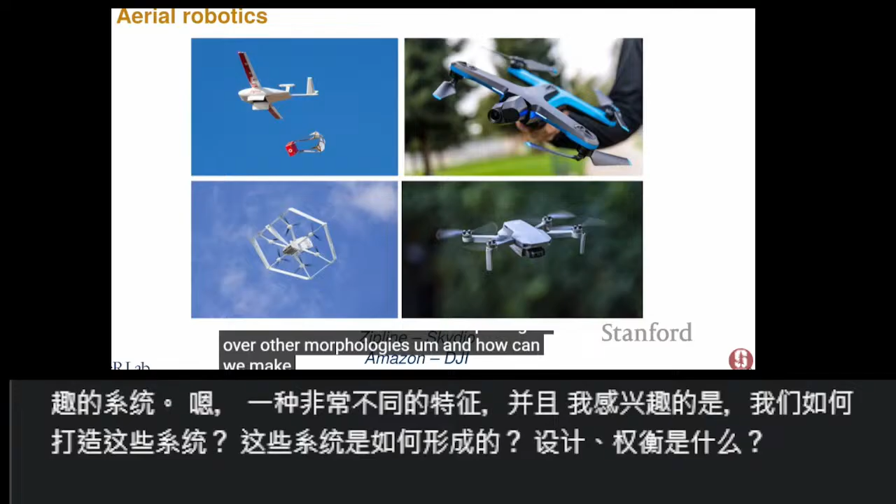And we see interesting systems that are out there that have very different characteristics. What I'm interested in is how do we make these systems? How do these systems come to be? What are the design trade-offs? What are the processes that make us choose certain morphologies over other morphologies? And how can we make this easier for engineers to create interesting systems like this?

So when we're creating such systems, we typically have trade-offs that we are struggling with. If you want to build an air taxi, you want to be quiet, you want to be autonomous, and you want to be safe, and often these are in tension with one another. So how do you think about creating these systems, and especially how do you create autonomous systems?

Often what we would do as designers is you build a system and then you pass it on to the next person, and the next person tries to make the system autonomous, design the control loop, etc. What I'm trying to get towards, or at least play with, is how can you simultaneously do mechanical design and controls design in one loop? And especially how do you use, for me, controls theory as a lens towards this? So how do we think about this from a controls theoretic perspective?

My list of slides is long, and what I want to do, hopefully, is talk about two specific challenges, which are problems, and then in those problems, I want to show three vignettes of different approaches that might solve a particular problem, and then briefly talk about some newer work where we try to close this loop.

And these first two sections will be mostly designs that sprung from some sort of place of inspiration from a designer, and what we want to get away from is having this reliance on the designer's creativity, but something that can automate this.

I don't really know the culture here, but if you have questions, feel free to interrupt me. That's totally fine from my perspective.

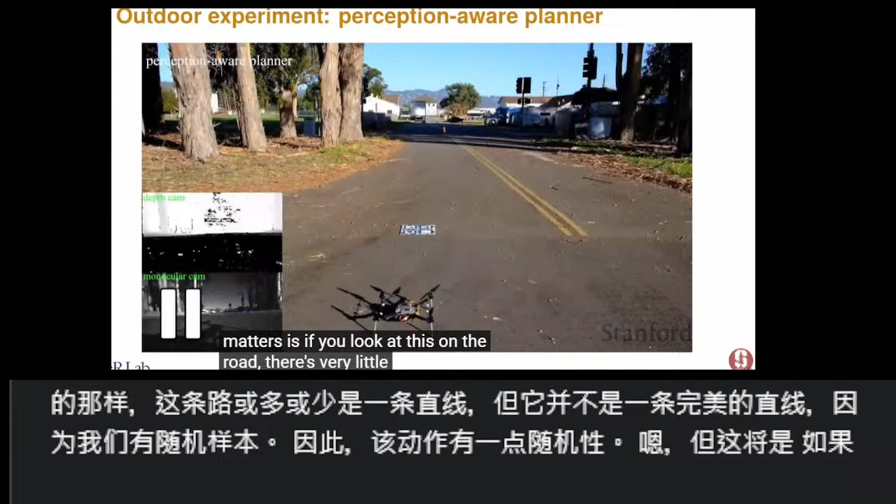Now if I add this perception-aware component, what matters is that on this road there's very little visual contrast. So the system, again tasked with just flying down range 30 meters, will actually veer towards the left-hand side where there's more visual information. It trades off some speed for being more confident in its motion and flying closer to these visual features, which gives it a much better understanding of where it is.

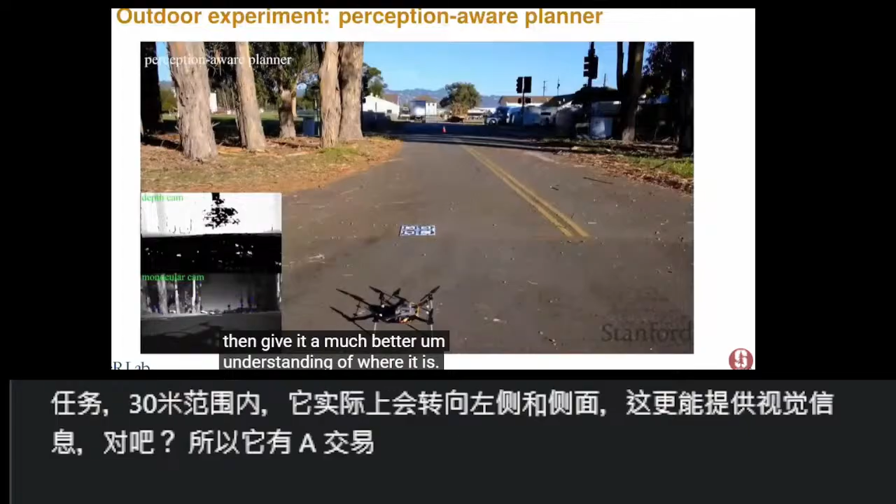This gives us, and it's a busy graph which I apologize for not spending as much time on as I should, a way to take these flights and show that the uncertainty, the EKF variance, effectively the uncertainty as you're moving, is reduced. Anecdotally, we find that these fragile failures in the perception system disappear the way we've set it up.

Certainly we're conservative enough that they don't seem to be happening. I can't prove it because these are sudden fragile failures, but with the baseline we do have cases where it's fine, it's fine, it's fine, then suddenly very wrong. With this perception-aware planner we are much more robust, and we can numerically show that the number of features we track is higher. Without the perception-aware planner there are regions with very few features, but if it plans with that in mind, we have more features and the uncertainty is lower.

So this is one way to try and be smarter. Another thing you can do is try to change your shape relative to the world. We like interesting mechanics in my group. One of them was inspired by one of our integrative biologists who told me their birds were better than our robots. And of course, birds are really impressive.

This is a goshawk flying through a narrow environment, and we see it changes its shape as it's doing this. Here's a totally gratuitous slow motion of the same behavior. We see that the way it does this is it has internal degrees of freedom that it can manipulate, to effectively make the world seem bigger.

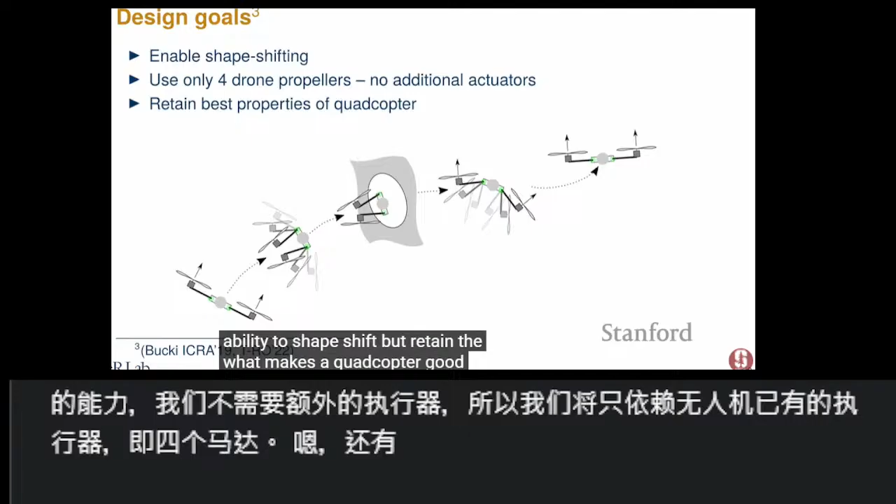The way we ended up doing this, the second iteration, the nicer design, looks like this. We have 4 arms, each with a thruster, the propeller, at the end. It has a hinge that allows it to fold 90 degrees up or down, with a mechanical stop on each end. The propellers are bidirectional, so if you anchored the body and the propeller pushes up, it extends; if you reverse thrust, it pushes down.

In flight it's a bit more complicated since there's no anchoring, but fundamentally I can have all 4 motors deployed straight and fly like a quadcopter, or reverse the thrust on some of these and fold them down. This gives us a system with interesting capabilities.

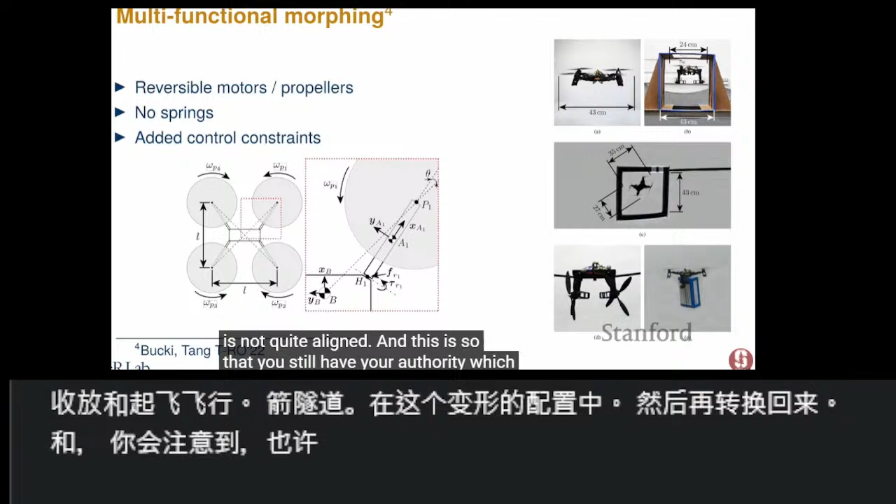Here we see the drone take off, fly like a quadcopter, and then fly through this narrow tunnel in this shape-shifted configuration, and then transition back. The way the hinges fold is not quite aligned, so that you still have yaw authority, which gives us the ability to hover the system in this reverse configuration.

It is horrendously inefficient in the folded configuration — you wouldn't want to do this for a long time. On the one hand, the disk area is much smaller, half the size, so that's a much higher power configuration. But also the yaw torque needed is quite high, and the propellers are very inefficient in reverse.

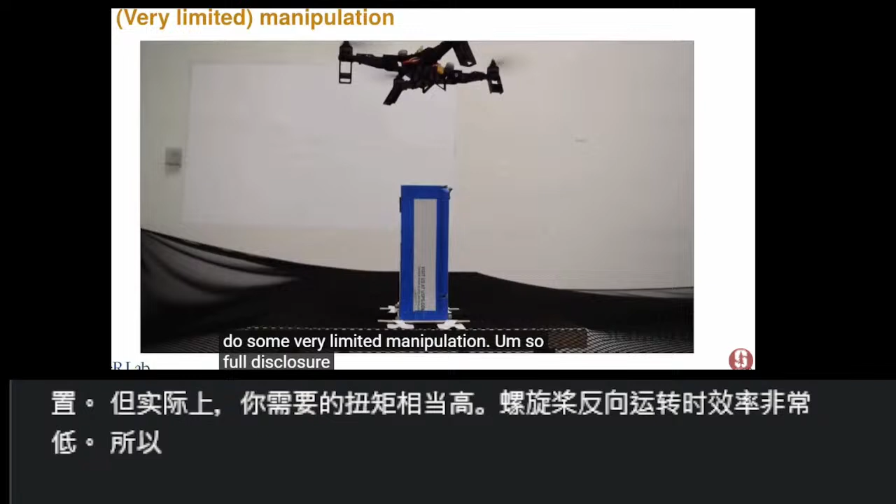But you can do things like these flights. You can also do other things, like some very limited manipulation. Full disclosure, the box has to be empty because we don't have enough grip nor thrust to carry anything bigger. This is obviously not the design point. We just discovered this sort of by accident.

But you can use this mechanism for other interesting things. So you can use this to pick up a box, and then you notice our position control is not nearly as good when we're carrying the box, but then we do some very limited manipulation.

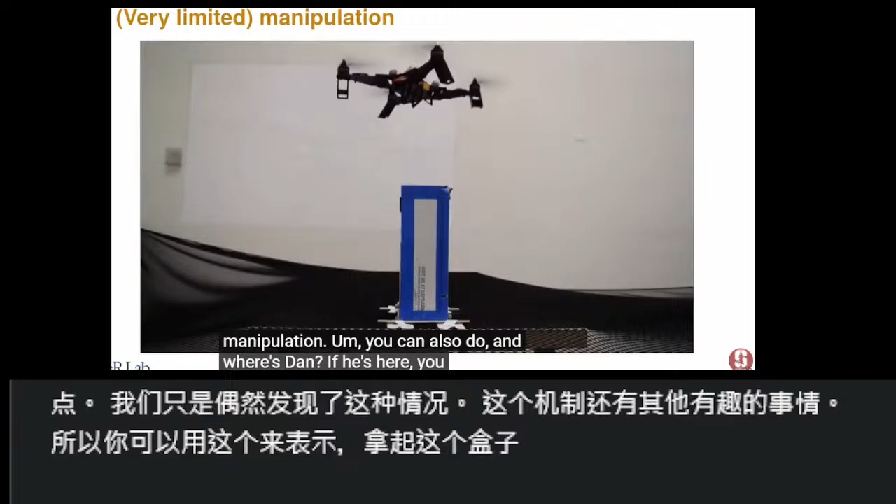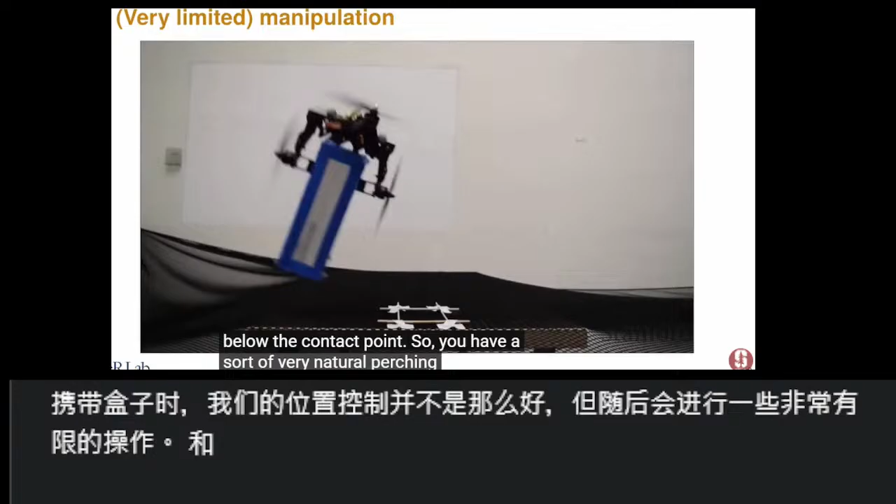You can also do some sort of perching with this as well. If you land on a wire, the arms fall down and that moves the center of mass below the contact point, so you have a very natural perching behavior. It does come at some slight cost, so there is some control logic you want to be careful about regarding thrust limits, so you don't accidentally fold the system, but that effectively just moves your minimum thrust up slightly.

Okay, so that's morphing, and the third thing to operate in dense environments is to cheat and just embrace collisions. We were interested, inspired by the DARPA Subterranean Challenge, in creating systems that can really operate without any knowledge of the environment, with no interest in avoiding collisions necessarily.

This is a tensegrity shape, and I was happy to see there's a tensegrity sculpture just outside here. A tensegrity shape is something where you have rigid rods enmeshed in a series of tension elements. What's nice about these structures as an engineer, as a sculptor they just look cool, but as an engineer, if you apply an external load, it's distributed internally either as tension in the strings or as compression in the bars, and both can be very strong modes.

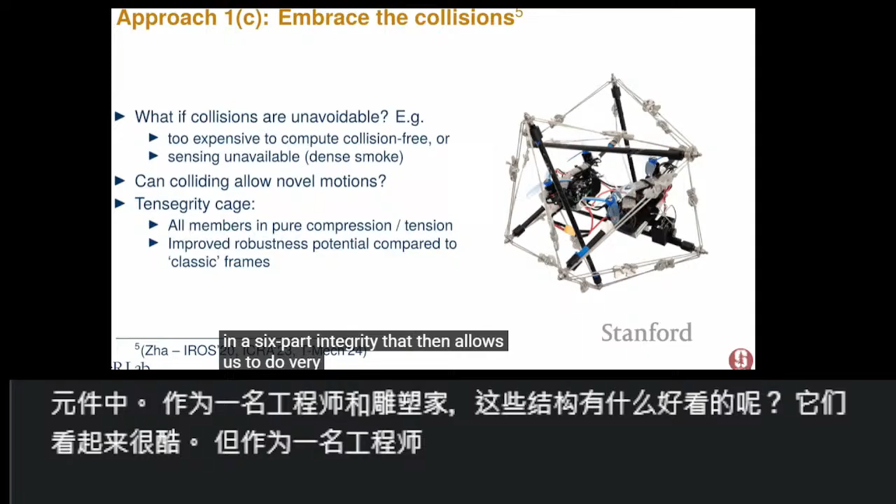This is as opposed to a classical quadcopter with an arm, if you hit the end of the arm there's a big bending moment at the shoulder, which is where you'd have a failure. So what we did is we built a quadcopter in a 6-bar tensegrity that allows us to do very large collisions, so we don't need to know anything about the world. We can just crash our way through it.

To design this, there's all sorts of analysis. This was a cartoon FEM system we created so we could simulate collisions and understand how the forces would be distributed, to size the robot. But the end result is a system that looks like this.

This is a robot on Berkeley campus. We're not allowed to fly here, so this is hopping for the lawyers. Its task is just to move forward. It has no external sensors, just its IMU, and its task is to move forward through the world. It has no information that it's on a ledge.

So what you'll see here is the robot take off, and then it falls down because it doesn't know where the ground is. It is approximately spherical, so we can use the motor thrusts to orient ourselves more or less upright, and then keep moving. We've bashed this thing into our lab concrete wall at 7 meters per second fairly reliably. At 10 meters per second you can do it a few times, and then eventually something will break, but it's a very robust system.

And what you can also do is motion. This is a robot tasked with moving from this side of the tree to the other side. Again, it's only using its accelerometer and rate gyroscope. It has no information about the world, and what we'll see is it crashes into the tree. Of course, we can detect a collision with the accelerometer, and we do these hops.

The reason we do the hops is this allows us to do dead reckoning with a fair amount of precision using only the IMU. The logic here is very simple: if you collide with something, hop to the left a meter and then try to go back to where you want to go. But I want to show here, it's kind of impressive that you can get pretty good dead reckoning from this. And the key here really is the hopping.

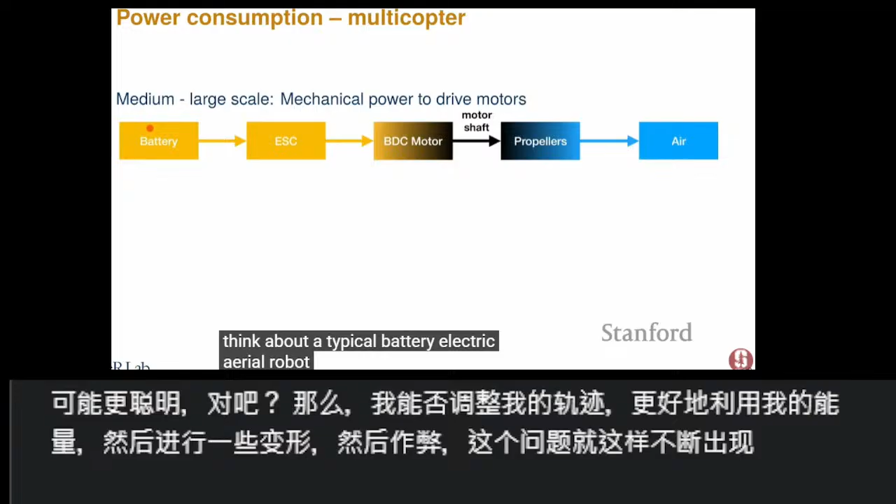Power consumption of these systems is very complex. If we think about a typical battery electric aerial robot, you have the battery that takes chemical energy and turns it into direct current. You have the speed controllers that take the direct current and turn it into alternating current, which drives the misnamed brushless DC motors that spin a propeller that pushes the air around, causing me to fly.

Now, I am not particularly interested in the first few things. These you pick from a catalog, you do a good job hopefully, and then you get fairly good performance. We were playing with the last bit here, where the propellers meet the air, and how we can think about efficiency there.

In general, this is difficult to model well. The propeller efficiency is a complex function of the speed of the propeller, like motion, translational speed. The aerodynamics of my system is complex too, drag of the body, drag of a payload, etc. And the system before this is actually also a fairly complex dependency on the rest of this.

So the electrical consumption will depend on the speed, the set point I'm running at, which will vary if I fly faster and have to counteract drag, things like this. So after trying and failing to do anything model-based and predictive, we kind of gave up and tried a purely data-driven approach to more efficient trajectories.

The intuition was: I have a system, I want to fly from point A to point B, so I assume I have a reference path that I want to follow. And if I fly faster along this reference path, I will have higher drag, right? Bluff body drag will go quadratically with speed. But at least to some extent, the propellers will be more efficient. So as I move faster, I can have some more efficiency.

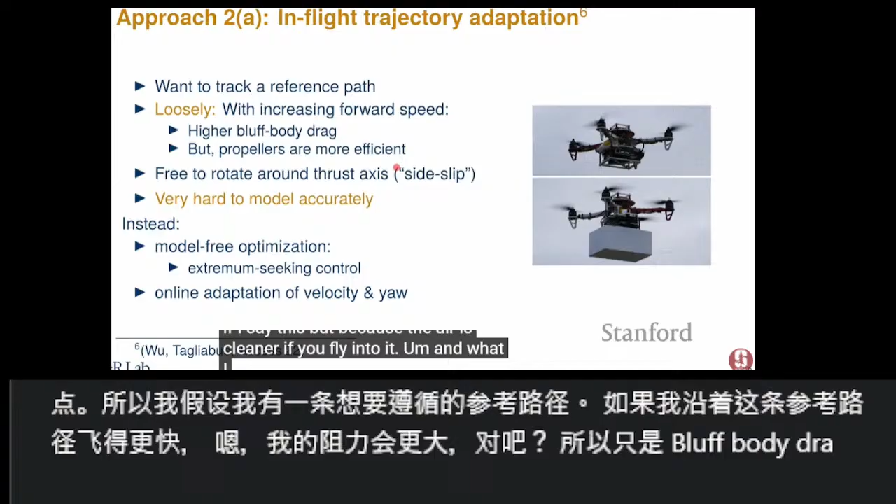Juan is going to murder me if I say this, but the air is cleaner if you fly into it. And what I get to vary is how fast I fly, and I also have this conceptual degree of freedom, at least for these hover-capable systems, of rotating around the thrust direction. We call that side slip, which is the angle of your body-fixed x-axis with the relative wind. So you have two things you can vary as you fly this path: how fast you're flying, and your rotation around the yaw angle.

And this will be very hard to model accurately. So what we did instead is use extremum seeking control, which is a very old technology from the 1930s, for doing arbitrary functional optimization for a closed loop system. The idea is using this, we can online adapt to both the speed and the yaw.

I won't talk too much about the mechanism. The intuition, for those who haven't done extremum seeking control, is that you have an input signal, you overlay a sine wave on that input signal, you look at the output signal, which will have a sine wave with the same frequency, and then with a convolution of these, you can effectively get a gradient, and you can walk down the gradient to move your set point to where you're minimizing whatever your cost function is.

We did some work to try and make this faster, because there are these two degrees of freedom you want to optimize, and they're orthogonal and so on, which allowed us to do this quicker. But what this gets you is a system where we have here a drone flying in our outdoor space.

So this is flying a large circle in lieu of a straight line, so we don't need to worry about line of sight. But this drone is flying this large circle. We have a graph here that's the forward speed at the top, then the side slip angle, so the 2 degrees of freedom that we get to vary. There is the energetic cost per unit distance, so joules per meter, and then the bottom is just the local wind as we measure it from a base station on the ground.

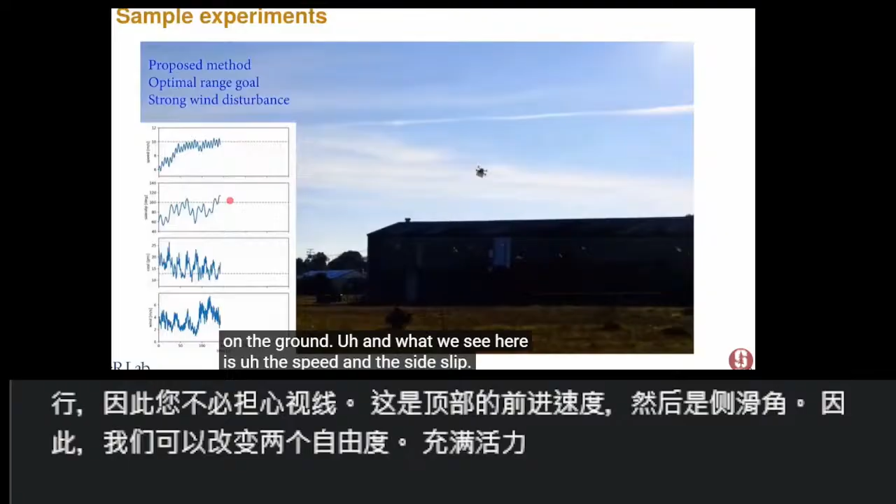And what we see here is the speed and the side slip. These dotted lines are things that we just did some offline characterization, and these are approximately where we think the optimal are, but they do converge to this. And what's nice about this is this allows me to really converge with no other information. I don't need to know anything about the payload.

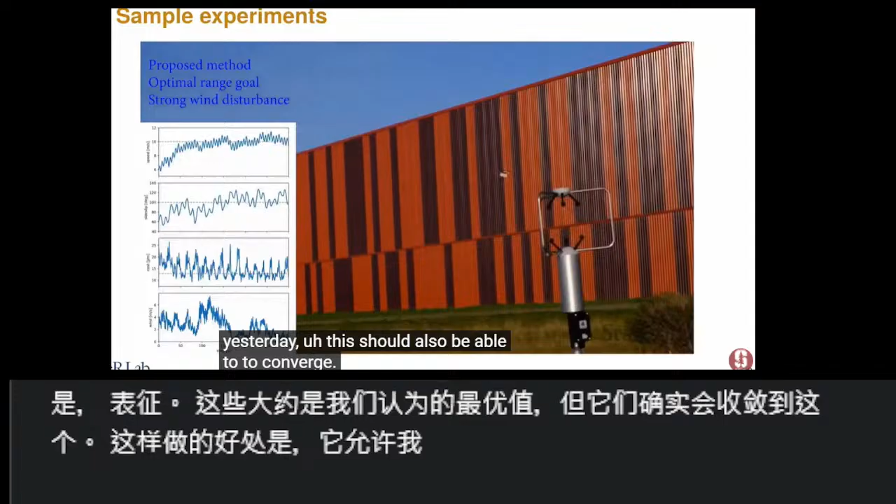If you give me a different payload today than yesterday, this should also be able to converge. Then, as I said, we were worried about speed, so we did some adaptation, modification of this algorithm. Specifically, we as researchers in the 21st century have done a lot of work on stochastic optimization, so some of those ideas you can apply to extremum seeking controller to just make it converge faster. So we sort of played around with that, but the details are probably not so important here. But again, this is sort of just being smarter, right? So taking your system and just sort of playing with the algorithms to get more out of the system.

Then again, my heart beats for weird mechanisms. We made a weird mechanism for morphing the system. So if you take a drone, a quadcopter, and you try to fly at high speed, you end up with something that looks like this. So this is very cartoon level CFD. But you have the drone, you have to produce your thrust forward, and then you have the drag of the system that you need to overcome.

As you try to fly faster, you're basically increasing that surface area, so you have more drag, which means you have much less efficiency. And ironically, the system tends to act like a wing pointing downwards, so you actually have negative lift that you also need to compensate. So if I could tilt the propellers without tilting the body, I could get the forward thrust without this additional drag. So we worked on a system where I can tilt the propellers, but again, do this without actuation. So I only want to use the 4 motors.

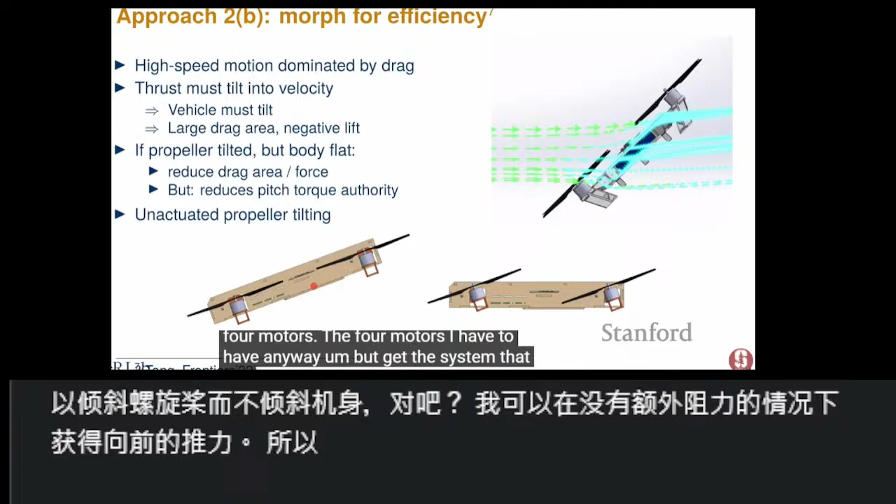The 4 motors I have to have anyway, but get the system that can operate in these 2 different configurations. The way we did this is with a sprung mechanism where all 4 of the propellers move together, so there's 1 internal degree of freedom. There is an internal hinge and a spring attaching the propeller to the body. And what happens is, you can think of it as a click-click bistable mechanism where in the downward configuration, there is a certain maximum amount of thrust where you would overcome the spring's restoring force. You would have this thing buckle up, it will hit some mechanical stop. When it moves, the spring's geometry changes, so that restoring force changes. And then to get it to go back, you need a much lower minimum force.

What does this look like? This is the vehicle flying outdoors. Doing that switch here is in our lab, doing this switch. Of course, not particularly useful if all you're trying to do is hover, maybe just by motivation. The untilted configuration is nice. Why not always tilt? The untilted configuration is good because you have larger moment arms, so at low speeds, you are more maneuverable with perpendicular propellers, but of course, you just have higher drag. But what this gives us is much higher maximum speed, for example.

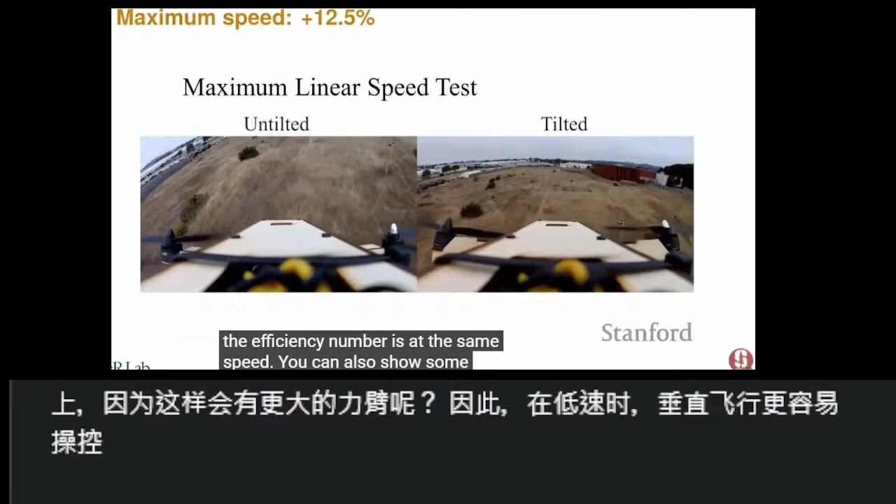Here we have the system with the tilted configuration on the right and the untilted configuration on the left. We can achieve about a 12% faster flight - I forget what the efficiency number is at the same speed, but you can also show something like a 10-15% decrease in energy required while flying. It's not quite for free though, because there's a thrust limit now. So when flying, you have to plan about maximum or minimum thrust so you don't accidentally switch configuration between these two configurations.

Lastly, on this topic of efficiency, how can we cheat the problem? Again, I want to fly a long time - let's just think about changing the problem so that this is easy to do.

If you think about this powertrain I've described, and how the propellers interact with the air, a simple model of this is called the actuator disk model. This is almost cartoonishly naive when you first learn about it - you model the propeller as a magic disc that just adds energy to the flow. Nothing is rotating, but it's surprisingly predictive.

From this, you learn that if you want to do long duration flights, you either want a lot of energy or low power. You can reduce the power by increasing the size of the propellers or reducing the amount of force needed per propeller. You can also change the amount of energy you store.

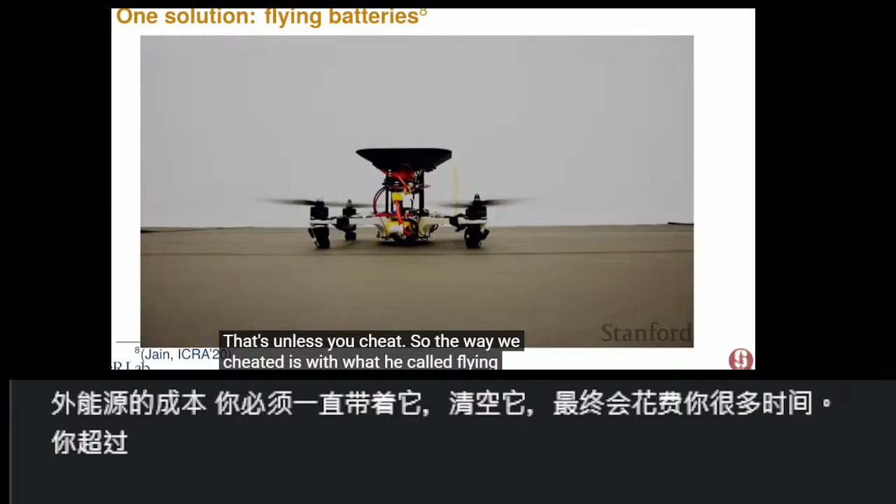The way we cheated is with what we call flying batteries. The idea is I have my main system that I want to do something useful, and then we have a small system that just brings it more energy. What this gives me is a robot that can fly potentially arbitrarily long.

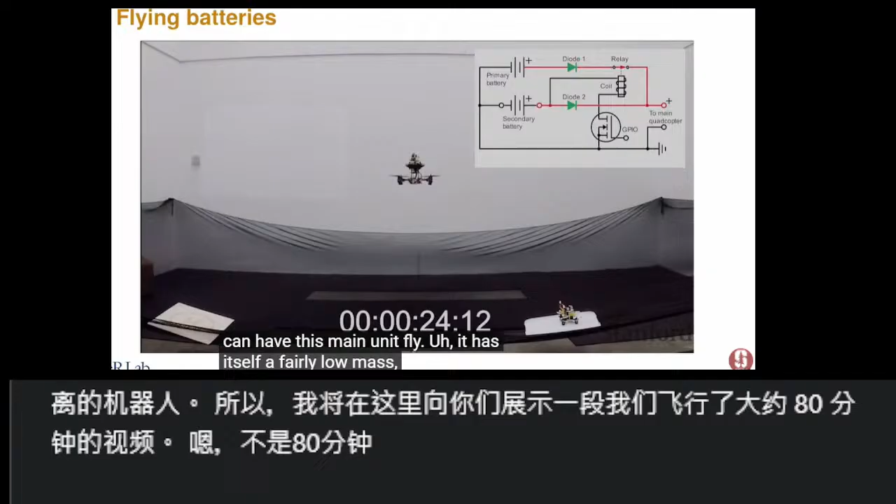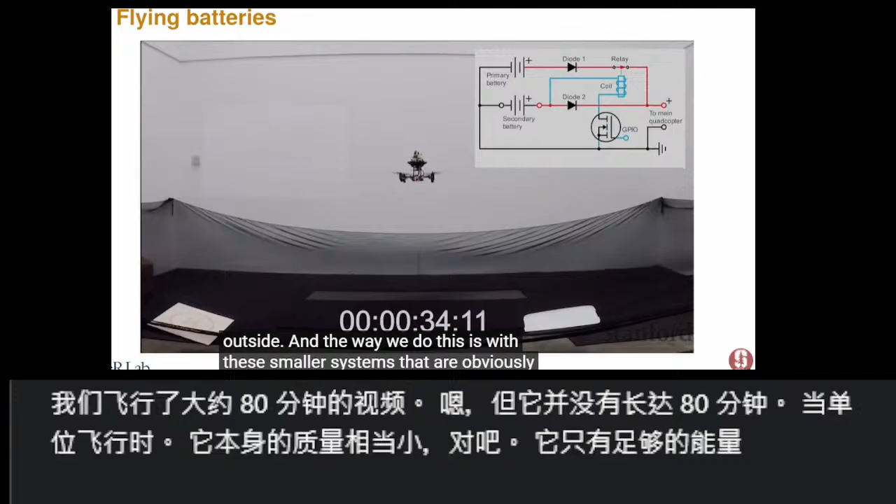I'm going to show you a video where we flew for around 80 minutes - it's not an 80 minute long clip though - where we have this main unit fly. It has a fairly low mass itself, only enough energy for effectively taking off and landing, but we can bring additional energy to it from outside. We do this with smaller systems that carry a much larger battery than they themselves need, and up here there's some circuitry to make sure you don't set fire to the drone as you connect these batteries.

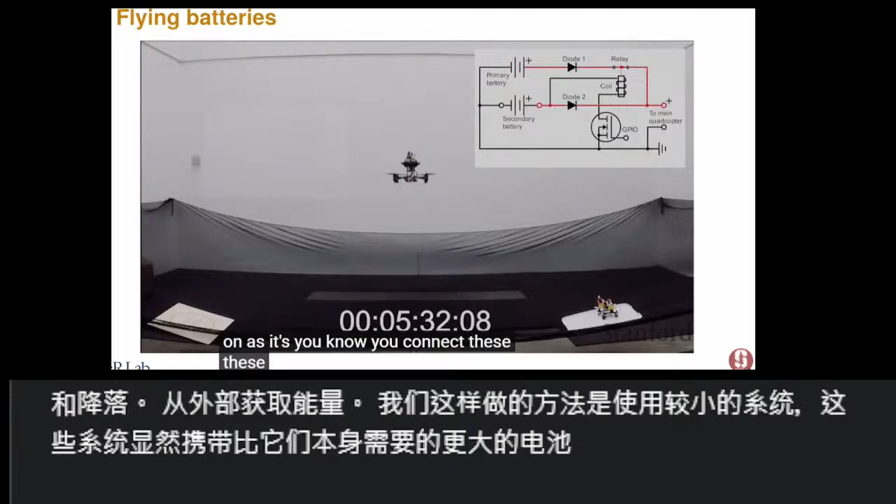The circuitry is not that sophisticated - it's effectively some diodes, which just mean one-way current flow. Here you see this maneuver where we have the battery come in and out, and what we can now do is fly effectively indefinitely with the main system.

If you're doing something like an air taxi, this might be one way to get around the problem of how to make a system light enough and small enough to land safely in crowded environments, but still have useful range. Just bring the range as you're moving - you don't need to carry everything with you.

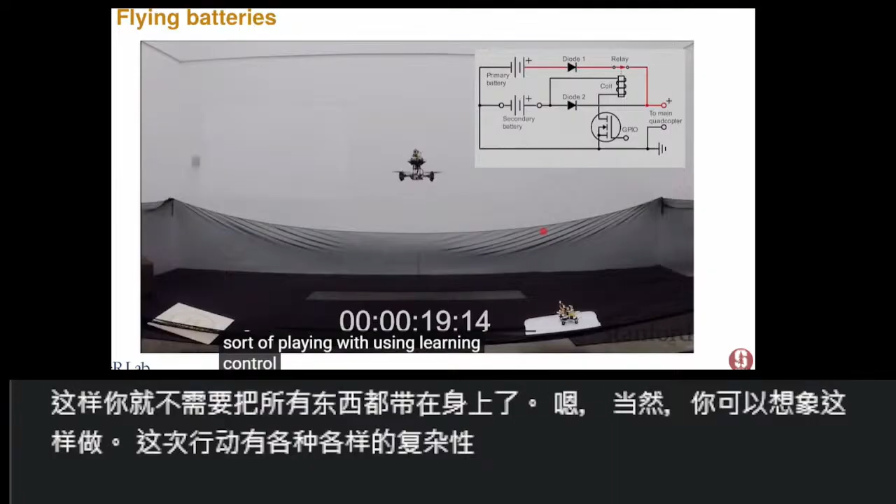You can imagine there's all sorts of complexity here in this maneuver and the mutual interaction, which I'm not going to get into. We've most recently been playing with using learning control for this docking maneuver, which seems to work surprisingly well with fairly little effort compared to originally when we were doing a lot of model-based feed-forward corrections for the aerodynamic disturbance.

So with all of this, how do we go about automating this design process? Each of these approaches effectively comes from some spark of inspiration, some idea like, why don't we try folding the arms or something like this? So how do I automate this problem? How do I give a designer a tool where maybe you do more of a high-level sketch of the problem and it gives you some possible designs?

I think we'll never get to the point of automatic design because the design space is always too complex and our value functions are always too vague to meaningfully automate the whole system. But what I'd like is something that gives me a rough idea in the feasible space, for me to interrogate, to play with and see how well it fits my particular problem. So I want to talk about three ideas: closed loop co-design, learning from simulation, and synthesizing interpretable policies, which hopefully fit into this bigger problem.

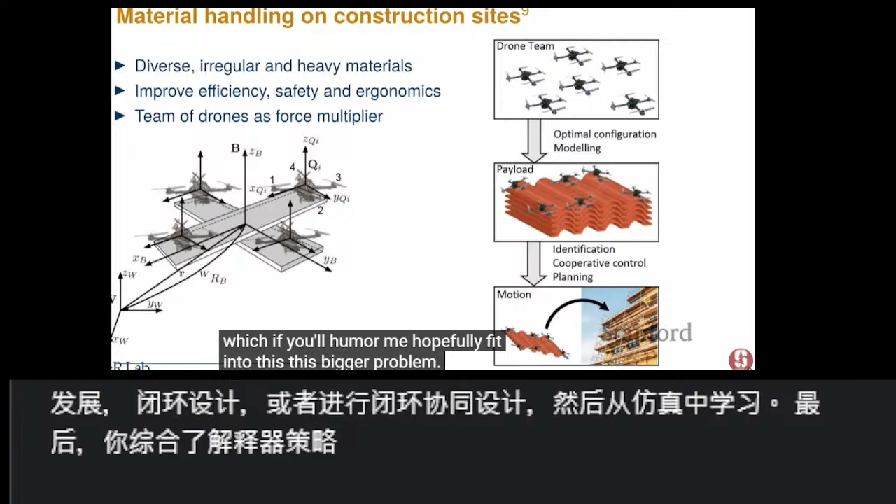The closed loop co-design is motivated by a fairly mundane material handling problem. Maybe I'm on a construction site and want to carry some oddly shaped material from one point to another. I'll assume I have access to a bunch of lifting units, drones effectively, that I can attach to the material I want to carry, and then I want these things to bring my material where I want. Of course these are drones, so I can't replace a crane because I can't pick up really heavy things, but I can help by moving some lighter things from point A to point B.

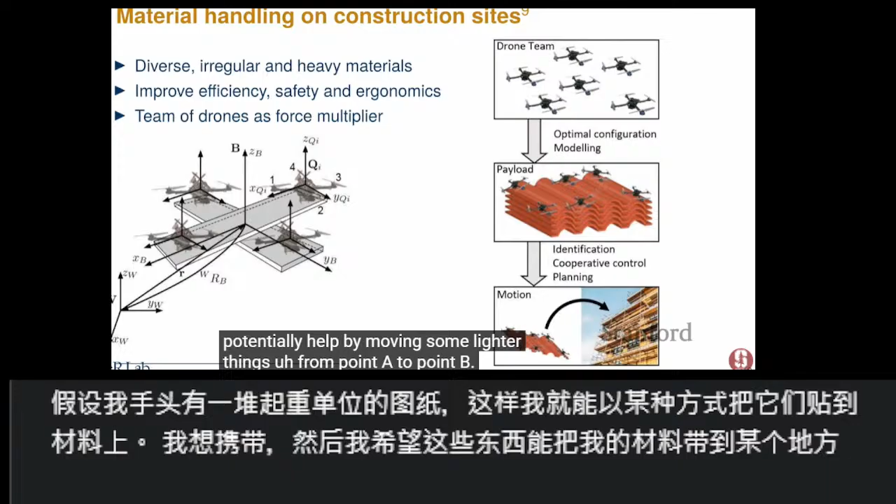We'll assume that the payload I'm moving has known characteristics, so I know its geometry and mass properties, and I'm able to attach my lifting units somewhere on the perimeter of the object. What I'm searching for is where to attach these lifting units on the object so that I have robust performance. Loosely, if I'm carrying this particular weird box, where should I put these things so it gets there even when there are disturbances?

It's sort of a cartoon of a drone design problem where the only degree of freedom I'm playing with is the location, and I'm doing this on a 1D search for each agent, so it's a very simplified controls problem. But I want to do this in closed loop - I don't want to design some open loop characteristic, I want something that tells me, for the best controller, this is the best performance you're going to get.

Our control objective we frame as follows: a robust system will be one that has the least probability of actuator saturation. As there are disturbances, your thrust forces will vary, and I want to keep those thrust forces as far away as possible, reducing the likelihood of them hitting either the minimum or maximum bound. The thrust force I have in closed loop consists of two things: the static feed-forward term, just the hover thrust required to keep this thing flying, and then the feedback term, which is in response to disturbances.

So what we do is we model our system and linearize it, and we assume that the disturbances are Gaussian. The disturbances here are force and torque disturbances acting on the system. Then we do an H2 approach to effectively calculate the statistics of the inputs. Then we calculate this Mahalanobis distance, which is a bit of a kludge, to approximate the amount of probability mass that we have within the feasible range.

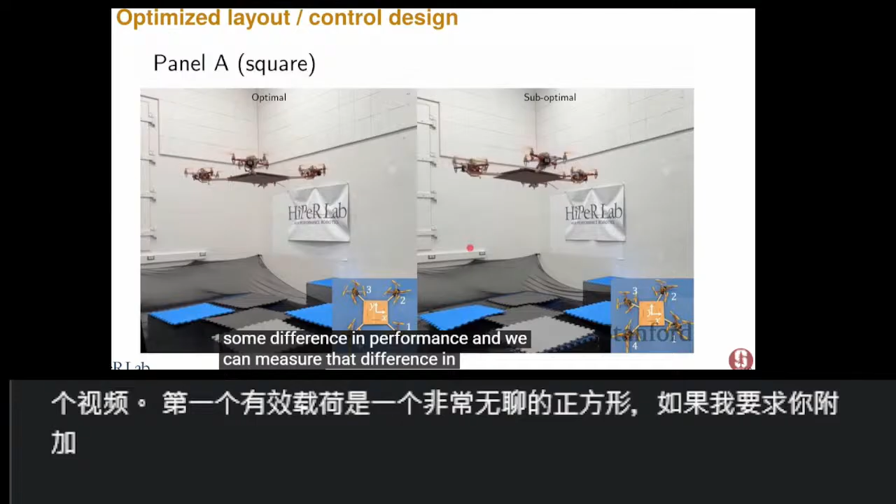So the end result, I want to show you two videos. First, this video, the payload we're carrying is a very boring square. And if I asked you to attach the 4 lifting agents to a square, you'd probably come up with the optimal configuration, which is to put them in the corners. This video just shows we predict some difference in performance, and we can measure that difference as well. The optimal configuration does actually outperform the suboptimal configuration, even though in this case it's probably not particularly useful to need heavy machinery to solve this problem.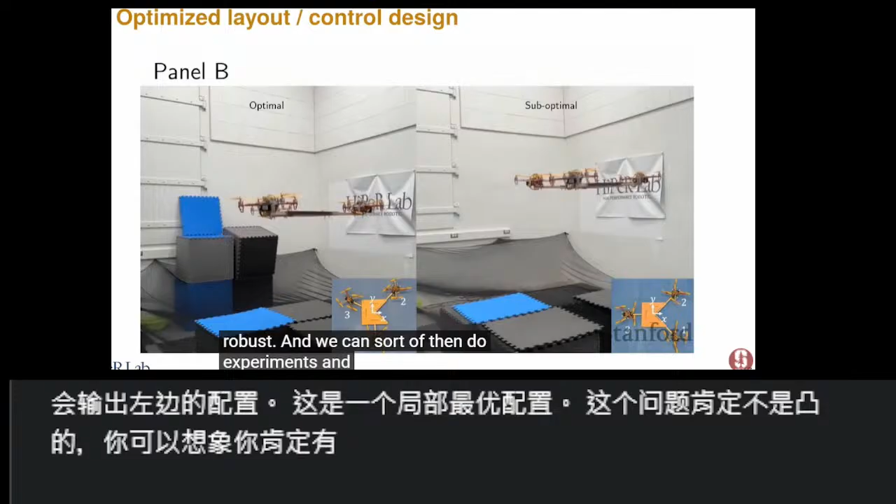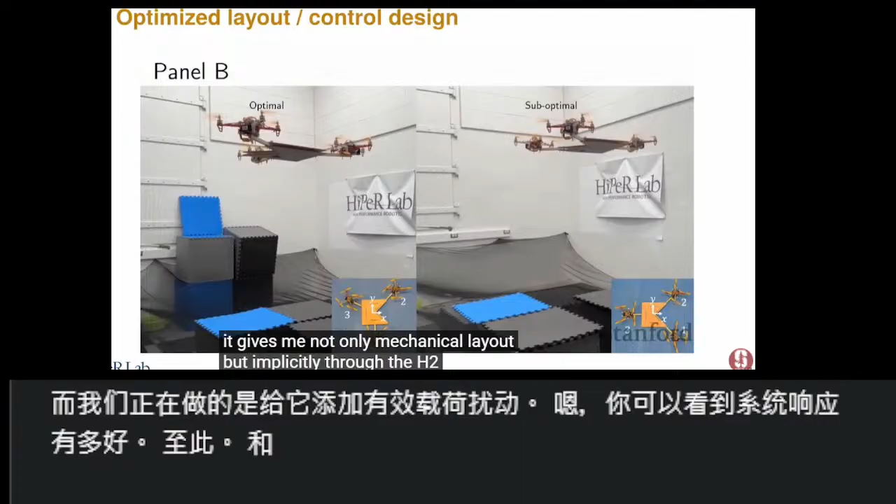And we can do experiments and see that. So here we have these things hovering, and what we're doing is adding a payload disturbance, and you can see how much better the system responds to that. Again, the idea is when I'm posing the problem, it gives me not only the mechanical layout, but implicitly through the H2 control analysis, it also gives me the feedback controller gain that you should fly with.

Okay, so that's one thing, and we can do this for simple problems where we can linearize and use all of these great tools from linear control. If you want to go beyond this, it's hard, right? For systems where we do complex maneuvers where the nonlinearity matters, I don't know how we would solve these kinds of problems except with very large-scale Monte Carlo, which would be slow.

So one of the things that's not quite in the design space yet is: if you give me a weird design, can I come up with a good controller for it without the designer having to sit down and do that controls design? And of course, a lot of our learning techniques go to this.

So I gave Daisy, the student who worked on this particular subproblem, the challenge of designing a controller that will carry different payloads smoothly. I don't want to tell you what the masses are, just adapt to different payloads as you're flying. But then we quickly realized that's pretty easy, so we pushed this further, and the cartoon problem now is: design me a controller that can fly any quadcopter.

So give me a little chip that I can hot glue onto your drone, attach the motors to it, and it'll fly. I do need to know that the motors are symmetric, arranged like an X, and I need to know which direction is forward and what the IDs of the motors are, but I don't need to know the size of the system, I don't need to know any mass properties, I don't need to know the speeds of the motors. I'm just giving the motors some sort of black box command, and I have access to IMU data and my actions, right? And from this, I want to fly this quadcopter.

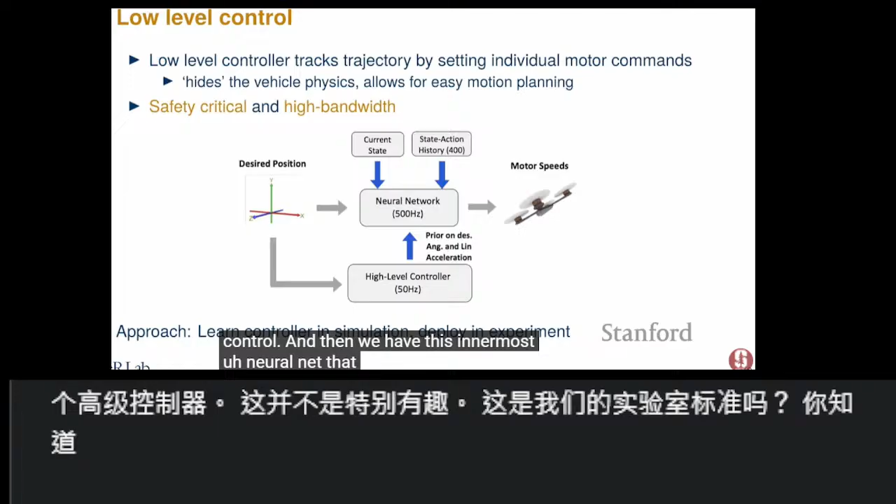The way we work is we have some sort of outer loop that sets some desired position. We have a high-level controller. This is not particularly interesting here. It's just our lab standard nonlinear proportional derivative style high-level control. And then we have this innermost neural net that does the tracking and hides the physics.

We learn this controller. We base this off of the RMA architecture, popularized especially by Jitendra Malik's group when they were doing legged robots. The idea is you have something that looks a lot like indirect adaptive control, where you have a low-level controller that has as input some sort of parameters that are a function of observations. Your low-level controller in indirect adaptive control is typically an LQR controller parameterized by, say, mass parameters, and you have an extended Kalman filter which estimates the mass parameters as you're operating.

Here, none of this is model-based. It's all black box neural nets. So we have our low-level controller, and we have what we call an extrinsics encoder. The extrinsics encoder is trained in two phases.

In the first phase in simulation, we train a low-level controller that is parameterized by these extrinsics. The extrinsics come from an extrinsics encoder that in the first phase has access to the true parameters in simulation—the true mass parameters, the true size parameters, the true propeller coefficients, things like this.

In the second phase, we freeze the low-level controller and just learn an adaptation module that now has access only to the sensor and commands from the system—something you can actually causally implement. Then you learn this to generate extrinsics which make the system work well, and you deploy these statically in experiment.

When we train this, we use a fairly broad range—I think these numbers I should update since the newer publication was just accepted—but we train on simulated systems with mass varying by almost a factor of 10, in mass and amounts of inertia, 2 orders of magnitude variations, things like this.

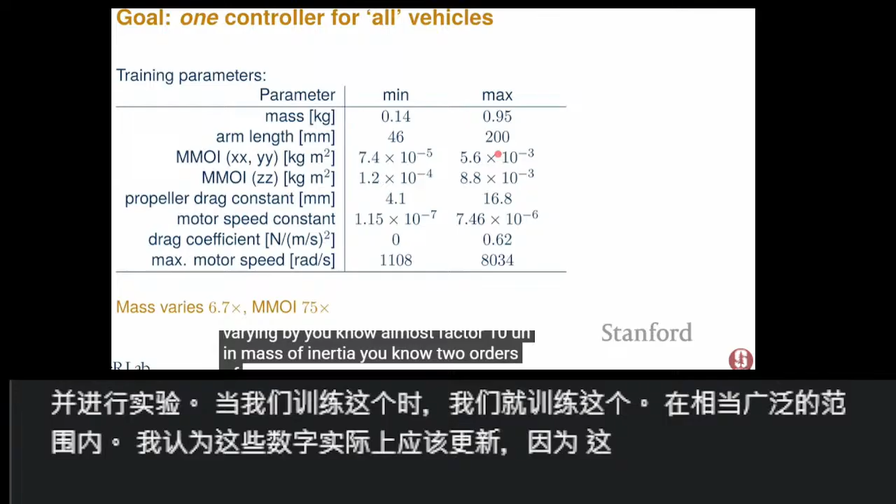What's nice about this is you can really mess with the system. So here, we're going to have the system flying. This is a slightly different drone. It's going to fly, and what Jerry is going to do—you can see how much glee he gets from messing with the drone—he's going to add a large payload as it is trying to fly the circle.

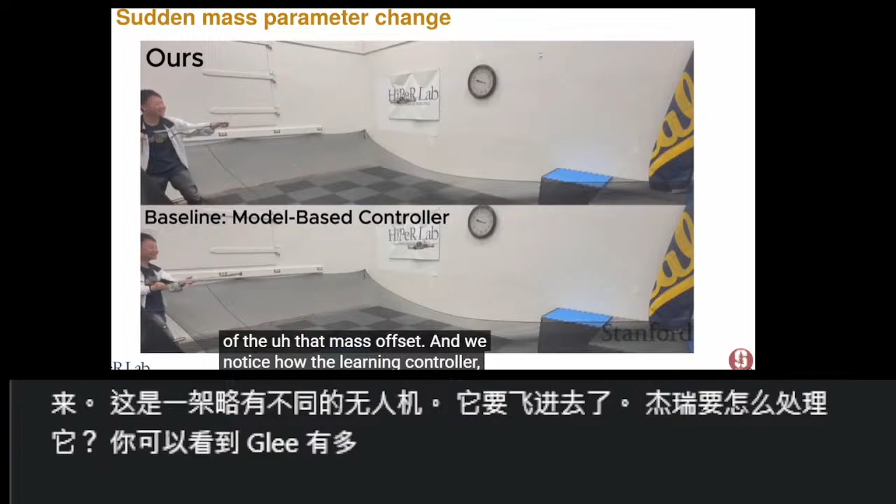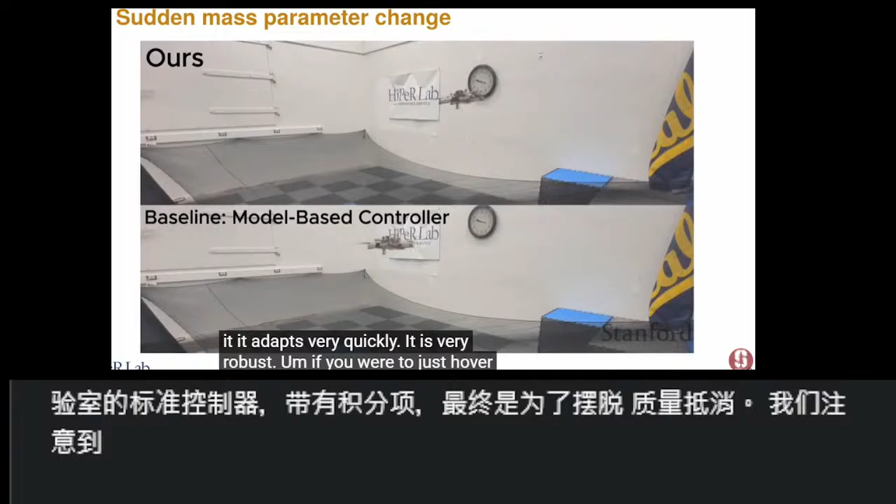At the top is the learning controller. At the bottom is our lab standard controller with an integral term to eventually get rid of that mass offset. We notice how the learning controller—it was shockingly robust to these perturbations, right? It adapts very quickly. It is very robust. If you were to just hover, our lab's model-based controller tuned for the system will do better than the learning controller in terms of RMSE and noise rejection, but for this sort of adaptation, it is pretty incredible.

I shouldn't say that strongly—obviously I love my own children, and I think my research is incredible. But I was really shocked at how well the learning base worked for this.

Why this is interesting to me is it gives me this idea: if I want to create a weird vehicle, maybe all I need to do is zip tie it together, put this controller on it, and see how it works. Now, this controller is probably not the best controller. If you sat down and measured the parameters, you'd probably come up with something better, but it's a reasonable controller. It gives you some idea of what's possible with your system. So as a designer, if you want to iterate on ideas, this might be a way of evaluating your ideas more straightforward, and doing that faster.

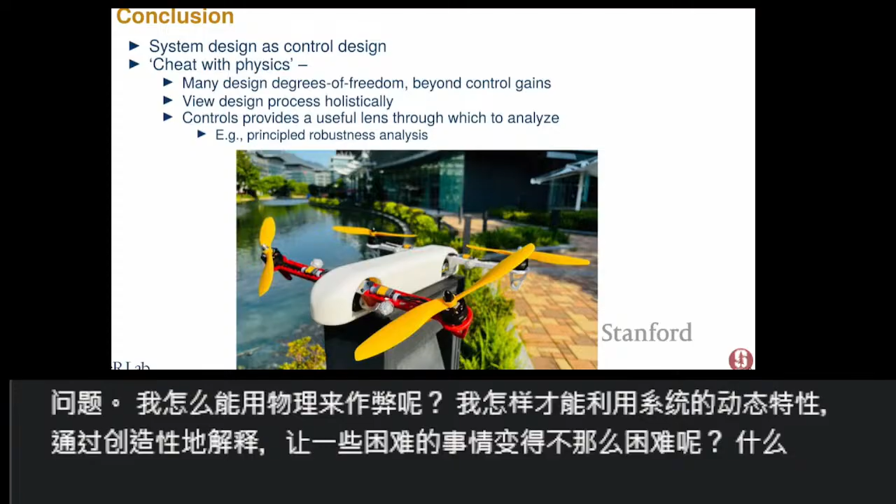Nice talk. On the LLM part, I was curious if the LLM is just doing this genomic combination, or is it actually using any of its reasoning capability as well? Because the case you mentioned where you have some impossible logical cases, I feel like an LLM would be pretty good at just reasoning about that and getting rid of those things.

Yeah, I apologize, I thought I would have less time, so I didn't put the details here. The way we do this is you can think of it as a standard genetic algorithm. Typically when we do a genetic algorithm, you have a finite dimensional search space, maybe 10 dimensions that you're searching over, each a real number. You have some cost function that you can evaluate at that point.

Then you have a process by which you take two possible values and generate a child from them, typically a simple average or something like this, and then you evaluate these. In this way, you can then search through your high dimensional space.

The space of code is, of course, somehow infinite dimensional, so you can't do this naively. So what we do is the cost function evaluation is: you give me the controller and I just run it in my simulation, and see if you succeed or not.

What we do with the LLM is we tell it, at least in broad strokes, this is the problem you're trying to solve, these are the inputs, that's the output. Here are two programs that solve this problem, generate a new program that is better. And better is, I don't know, what does any of this mean at the end of the day? It's a statistical model that has no understanding of anything. But what it does, and then there's the hyperparameter of the temperature of the LLM, like how much randomness does it add.

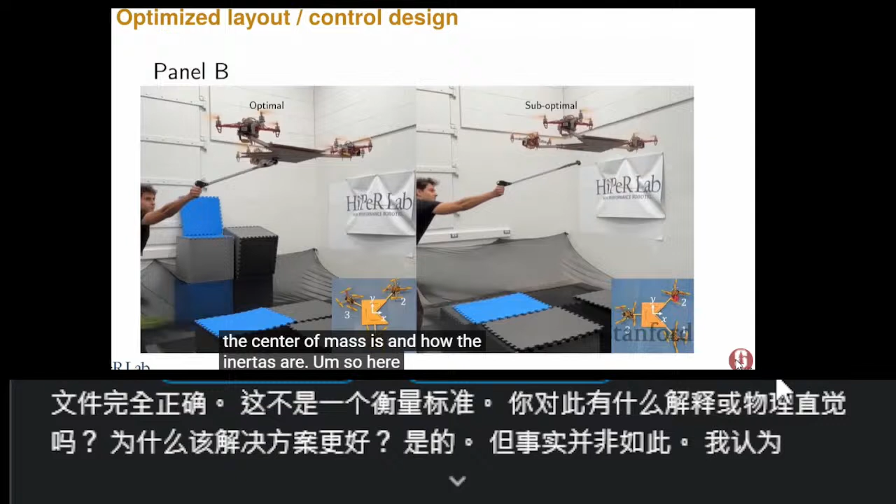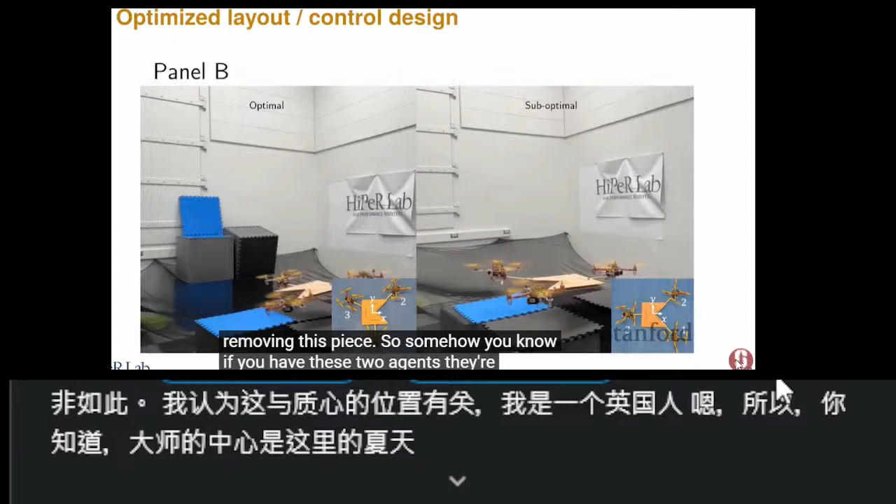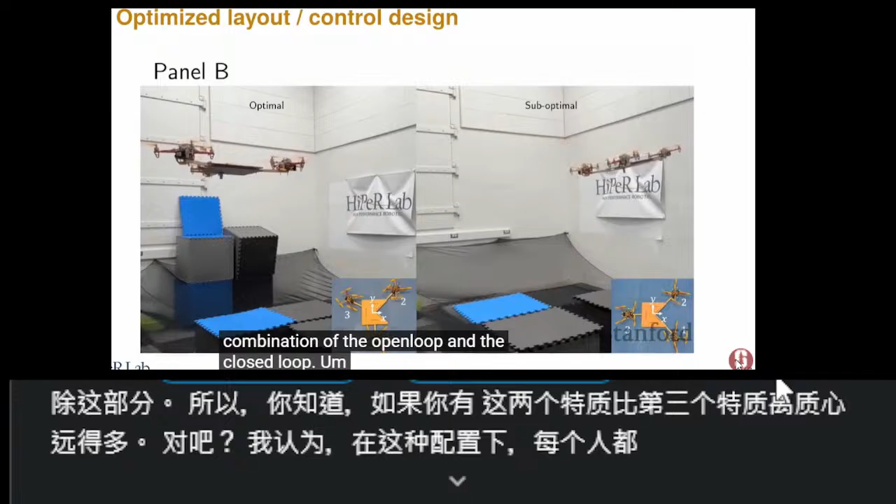So I have a follow-up also about that work. In the second example where you show 3 drones lifting a non-square shape, the solution the algorithm found is quite unintuitive, right? It's not symmetric. Do you have any explanation or physical intuition behind that? Why is that solution better? Just curious. Yes, by which I mean not really. I think it has to do with where the center of mass is and how the inertias are. So here the center of mass is somewhere over here, because you're removing this piece. So if you have these two agents, they're much farther from the center of mass than the third one. I think in this configuration, in the open loop sense, the open loop forces will be smaller. It's a combination of the open loop and the closed loop, and I think both the controllability aspect as well as the open loop forces will be more favorable in this configuration than in the right-hand configuration.

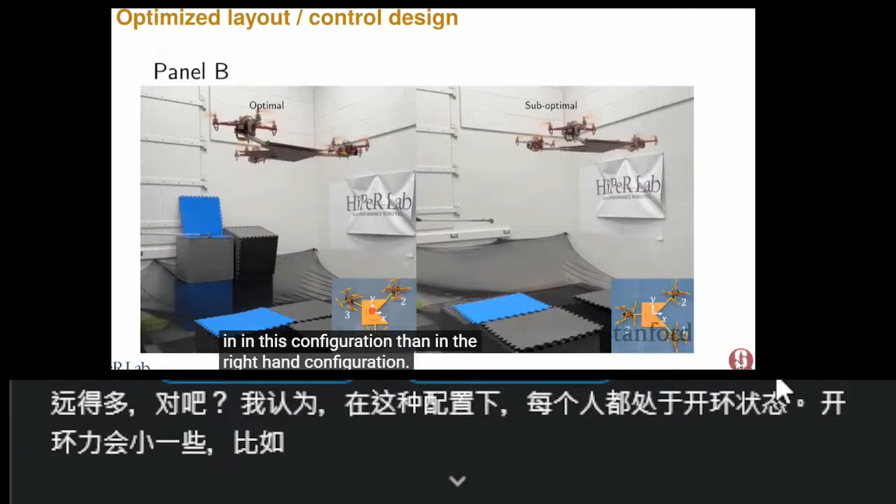One of the early works you were talking about was generating trajectories where you're sure you can stop by the time you hit an obstacle. And I think that's common in a lot of robotics problems, whether it's a small robot on the ground or something, you make this assumption that you can stop. But I'm wondering, when considering higher level co-design for aerial systems, like a fixed wing system or even a car on a highway, where just immediately stopping may not be a feasible solution, if you consider this co-design problem in that space, would you consider a safe trajectory to be a deviation trajectory or something like that?

Yeah, so that's an interesting question. If you have a system where either stopping is not an option—like if you have a fixed-wing aircraft and I stop, I fall out of the sky, so that doesn't work—or where stopping is not safe, so if I'm driving on the highway, stopping is dangerous, I think the question to ask then is what is safe, right?

So for us, we want to have the property of recursive safety: if I start from a safe condition, I remain safe, at least under assumption. So we assume that you can track the trajectory fairly well, that your perception system perceives the obstacles, that the world isn't moving, things like this. But at least under those conditions, as long as I start safe, I should remain safe during my motion.